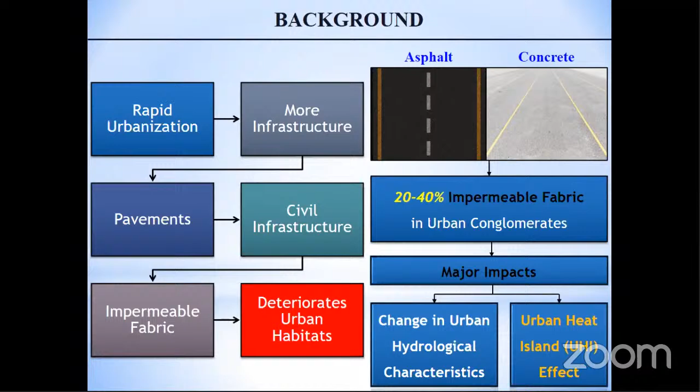We know these pavement systems are an essential part of infrastructure. But looking at these impacts, we need to come up with innovative materials or technologies, or pavement systems that actually improve the quality of life and help create a sustainable urban habitat.

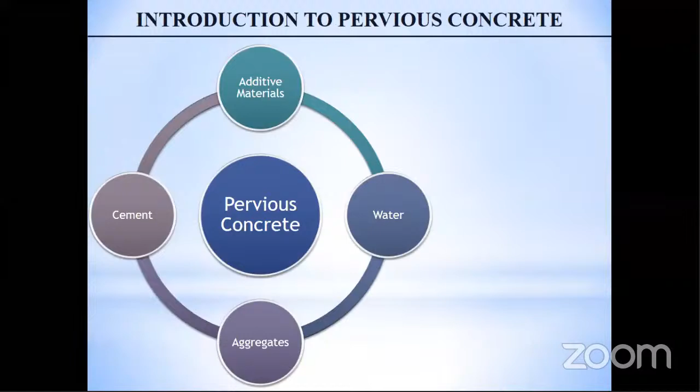The American Concrete Institute recommends that for a concrete material to be designated as pervious concrete, the minimum porosity should be 15%.

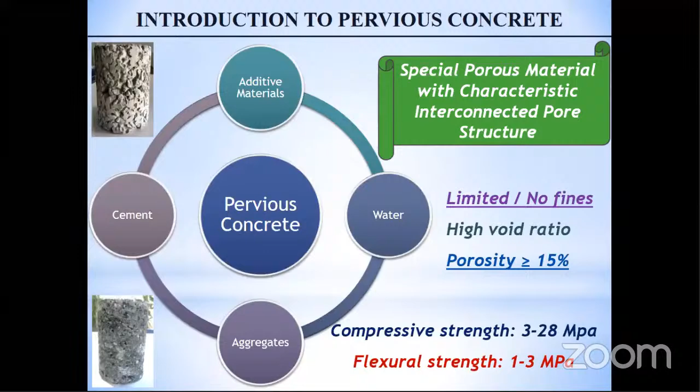The typical compressive strength of pervious concrete varies between 3 and 28 MPa, and flexural strength varies from 1 to 3 MPa. However, much higher values have also been reported in the laboratory.

Now, moving on to the applications. This material is suitable for low to medium volume roads, parking lots, or driveways. This is basically attributed to its low strength, which is due to the absence of fine aggregates from the matrix.

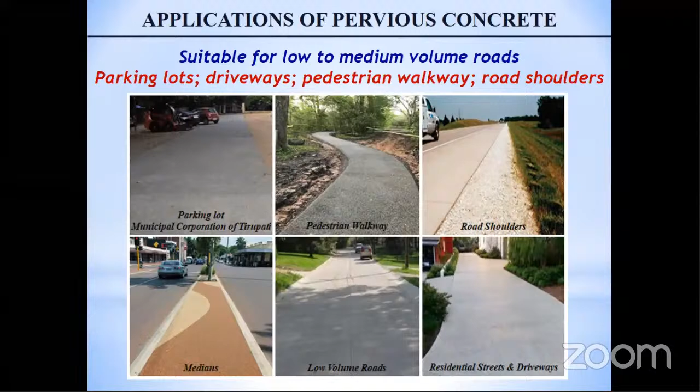Moving on to the materials and mix proportions. Pervious concrete is basically mostly designed with the use of single-sized aggregates. The most common size ranges for pervious concrete vary somewhere between 19 and 4.75 mm. However, recently some researchers are trying to incorporate sand into the mixture, and their new range has been broadened somewhere close to 1.18 mm as well.

Some other studies have further utilized fine sand of true gradation, but the dosages at which it has been added are relatively small, most of them being restricted up to 10% by volume or by weight of coarse aggregates.

The most common binding agent to create this pervious concrete material is ordinary Portland cement. Some other agents such as silica fume, fly ash, GGBFS may also be used. The whole idea of introducing those materials is to create a denser matrix as compared to conventional PC, which would ultimately result in higher strength characteristics.

The typical water cement ratio varies between 0.25 and 0.35 by mass. However, some people report it as high as 0.45. But based on laboratory investigations, we have found out that a water cement ratio somewhere close to 0.3 along with a super plasticizer gives us the best results in terms of strength as well as permeability.

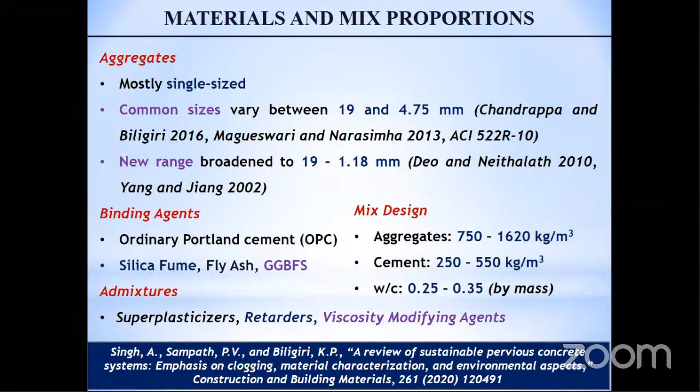In case you want more details regarding the materials and mix proportions, or some future work which could be done in this direction, you can go through one of our recent publications, a review paper published in Construction and Building Materials. It discusses several facets of this material while also highlighting the existing research lacunae.

Moving forward, let's discuss the construction of research test sections. Amongst the two test sections that we have constructed in Tirupati, the first one was constructed in March 2018 in the Municipal Corporation of Tirupati. This was actually a part of smart city work. The test section that was created was about 4 meters wide and 125 meters long. A binary aggregate gradation was used for the preparation of the pervious concrete layer.

By binary aggregate gradation, what I mean is that two aggregate sizes were used: one was 12.5 mm, the lower size, and the other one was 6.3 mm, the finer size. These two aggregates were blended with ordinary Portland cement in equal proportions to create a binary gradation. The cement to aggregate ratio was about 1:3.75, and the water to cement ratio was about 0.32.

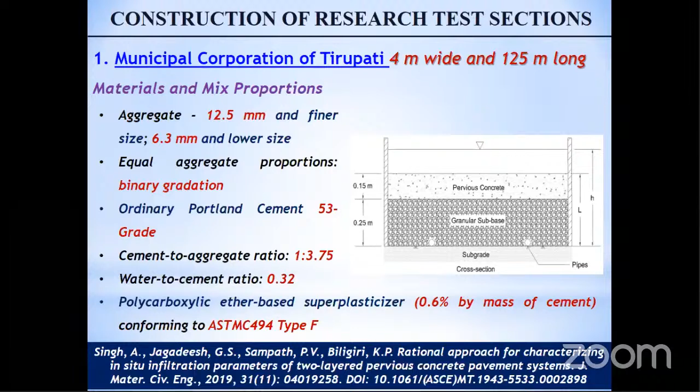Further, a super plasticizer was used in order to enhance the workability of the mixture. The results of the study are also published in one of the international journals, the Journal of Materials in Civil Engineering, which you can refer to for further information.

Now, in order to give you more insights on how this research test section was constructed, I would like to show you a small video.

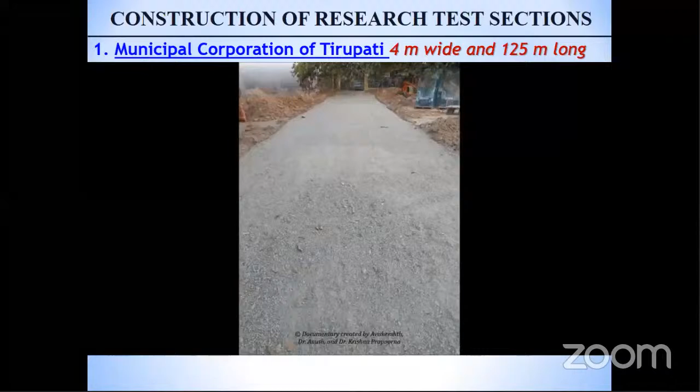As you see, this was basically an initiative for Smart City Tirupati. First, the string lines were drawn and the subgrade was excavated and prepared with the help of about 10 to 12 passes of a static steel wheel roller. Then granular sub-base material was laid and compacted again by about 6 to 8 passes of a static steel wheel roller. A formwork was erected towards one of the sides.

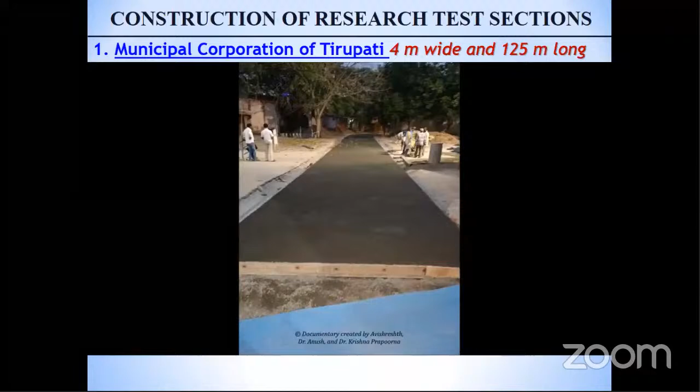This was basically a field laboratory that we constructed for research purposes. Alternate panels were constructed and the pervious concrete was compacted with the help of a vibratory plate compactor. The whole idea of constructing alternate panels was to make sure that the isolation joints were created without any deformations.

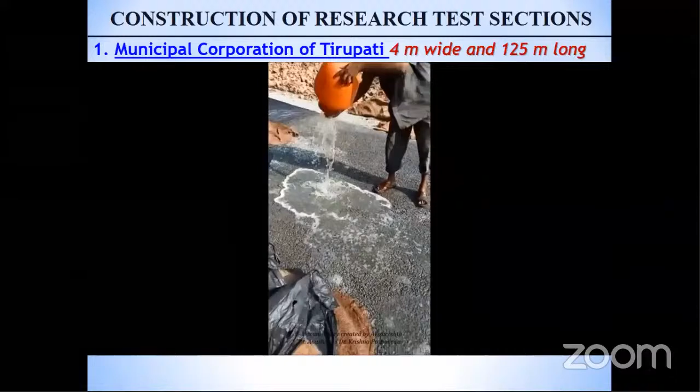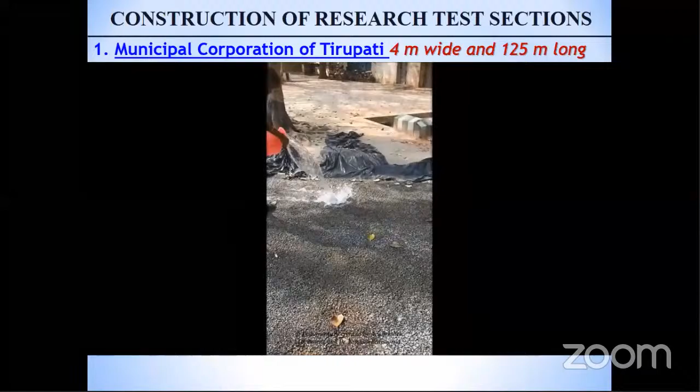Once the stretch was constructed, it was cured for about 7 days, and this was the final view of the test section. In these videos, you can see water being poured onto the freshly constructed pervious concrete pavement, and you can see the rate at which it is percolating into the ground.

Then again, as I discussed, a small formwork was erected towards one of the sides of the pavement. The whole intention of doing this was actually to compute the infiltration rate of pervious concrete pavements in the field.

A lot of literature is available which discusses the permeability rate of pervious concrete material in the laboratory. However, very limited literature exists which talks about the field infiltration rate of the pavement system, which includes both the surface as well as the sub-base layer.

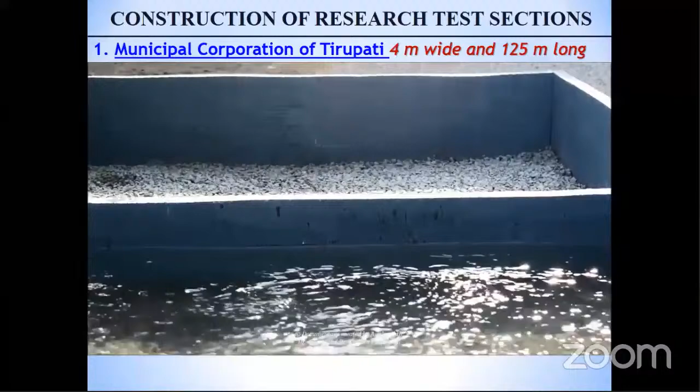Now, this water that you see percolating through the member is actually a real-time simulation. You can see the rate at which it is percolating. So in order to measure the infiltration rate, graduations were marked onto the formwork, and the time taken by the water to fall from initial to final head was noted. Later, Darcy's law was applied to investigate the infiltration rate.

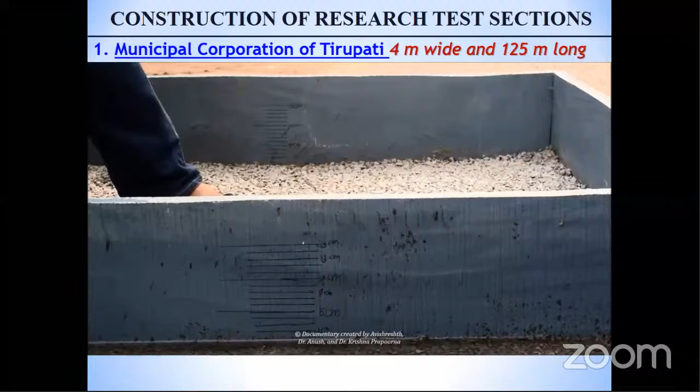Now moving forward, the first objective of the study was to construct the test sections, which was accomplished with huge success. Then the second aspect was to investigate the field infiltration of the pervious concrete pavement system, which included both the surface as well as the sub-base layer.

So the Green-Ampt equation as well as Darcy's equations were combined together, and it was found out that the infiltration rate of the entire system varied somewhere between 0.11 and 0.32 centimeters per second.

Later, we did a surface infiltration rate test as per ASTM C1701, where about 40 locations on the entire stretch were selected and investigated. It was observed that the surface infiltration rate varied somewhere from 0.02 to 1.28 centimeters per second.

At the bottom of the screen, you can see there is an infiltration ring being sealed with glass putty over the surface of the pervious concrete pavement, and graduations were marked onto this ring. The whole intention was to maintain the head of water between 10 and 15 mm.

The idea is to note down the amount of water and the time it takes to pass through the surface of the pervious concrete layer.

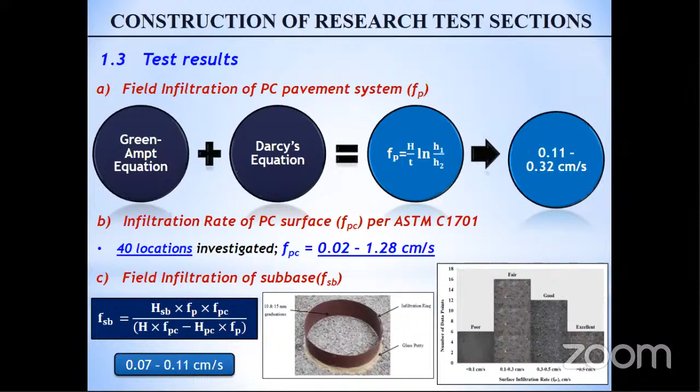The aggregate size varied between 12.5 and 4.75 mm, and the water cement ratio here was slightly lower as compared to the previous work, where it was reported as 0.32. In this case, it was about 0.3.

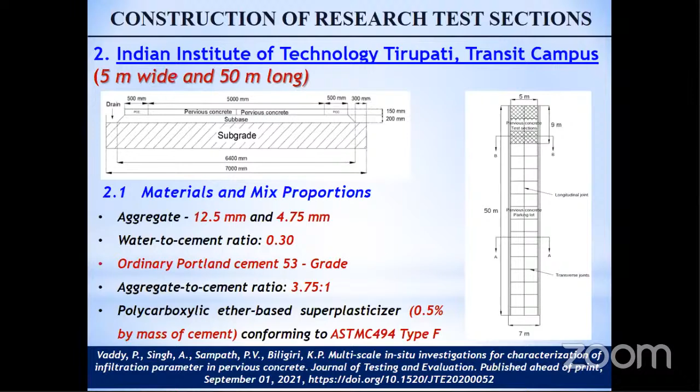Again, OPC cement was used, and the aggregate to cement ratio was 3.75:1. The results of the study have already been published in one of the international journals with ASTM, as the Journal of Testing and Evaluation, which can be referred to for further information.

So let's first talk about the construction chronology. We again excavated the existing subgrade. A large amount of boulders, termed as excavated granulates, were removed from the site, because the presence of such large boulders will lead to the development of a poor subgrade. So the first objective was to remove these granulates.

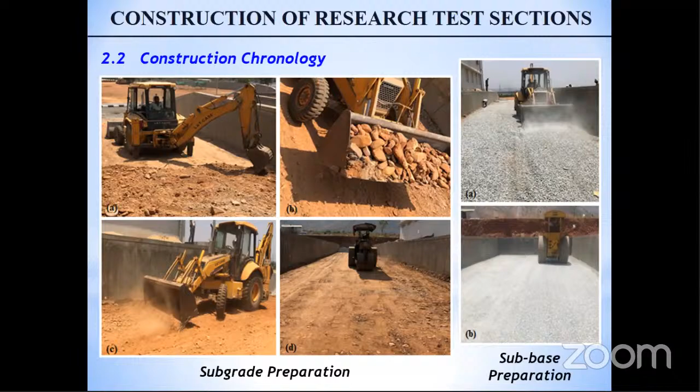Once that was done, good earth was laid, well compacted, which was followed by the laying of granular aggregates in order to prepare the subbase. Further, the subbase layer was compacted with the help of a static steel wheel roller.

Then again, as you see, panels and formwork were erected, and pervious concrete surface was laid. The basic difference between this study and the previous one was that in the previous study, in-situ preparation method was used. But in this case, ready mixed concrete trucks were used, where the concrete was first prepared at a batching plant, then came to the site and was poured through RMC trucks. This increased the rate at which the pervious concrete was constructed.

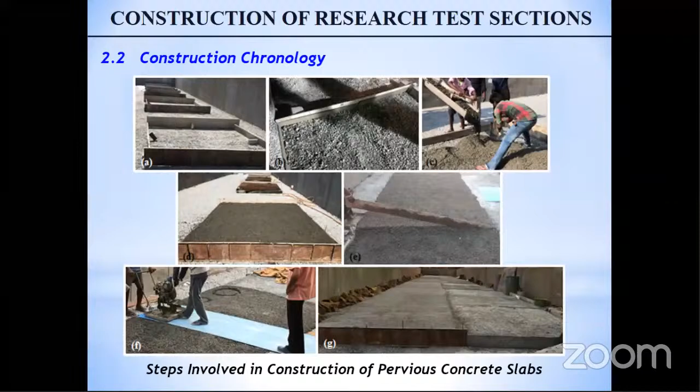As you can see, the surface of the pervious concrete layer was compacted with the help of a vibratory roller. On the bottom left side of the screen, you might see a small blue colored sheet over which the vibrator rolls. This was done to prevent the sticking of aggregates to the bottom of the vibratory compactor, as such a phenomenon might lead to stripping or raveling situations in future.

One of the objectives of the study was to investigate the infiltration rate through the surface layer of pervious concrete, while recommending the optimum size of specimen that could be prepared in the laboratory to replicate the field infiltration rate. For this, we had CPVC and PVC slotted pipes of diameters and dimensions as shown. These pipes were embedded within infiltration rings made of high density polyethylene material. As shown in the schematic, about 3 slabs were chosen where infiltration rings of varying diameters were placed, starting from 110 mm up to 630 mm.

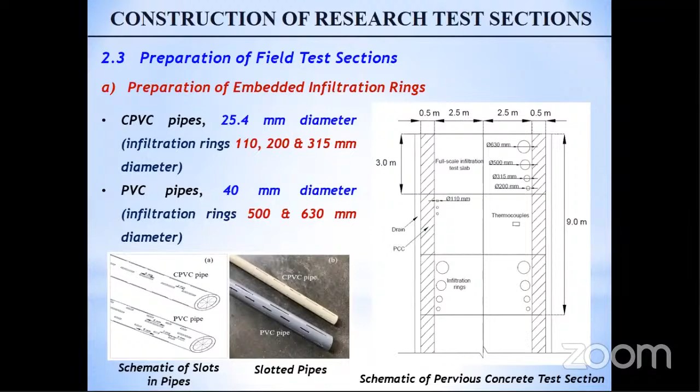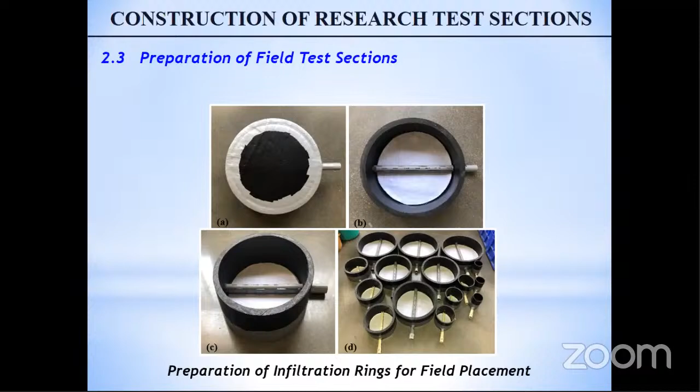You can see this is how the infiltration rings were placed. They were sealed at the bottom with geotextile materials. The objective was to seal the bottom so that water doesn't intrude into the lower layers, and also to ensure that aggregates from the lower layer as well as the top surface do not puncture the geotextile. Once all infiltration rings were prepared, they were laid onto the test section.

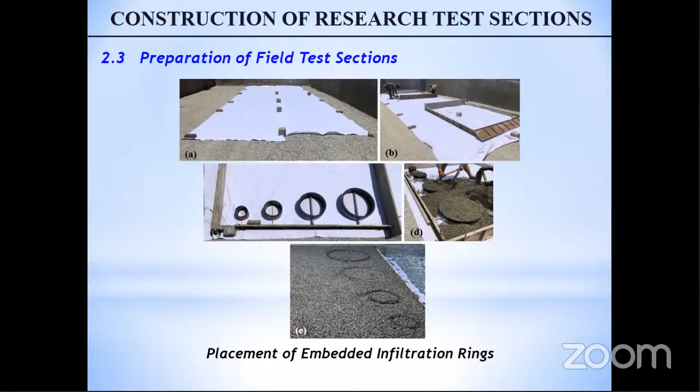As you can see, the pipes were placed adjacent to the formwork, and fresh material was poured into it and compacted in a similar fashion as we do for the construction of the pervious concrete layer. This is basically an infiltration ring which was placed over an embedded ring in order to investigate the infiltration rate of the system.

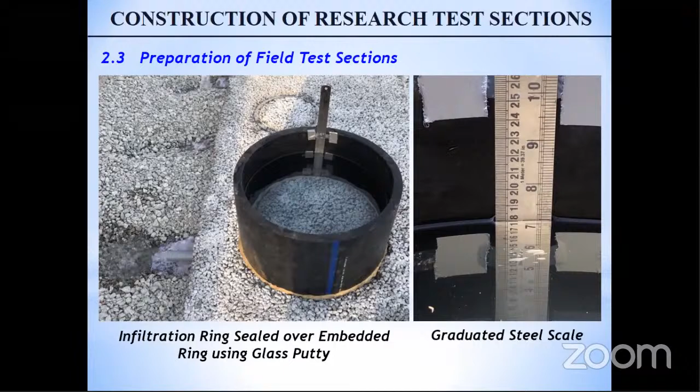On the right side, there is a small pipe projecting outwards from the pervious concrete layer. What we did here was fill up this ring with a designated amount of water. In the meantime, we kept the pipe outlet closed, and once the initial head was noted, the outlet was opened and the water was allowed to pass through the system. The time taken by the water to fall from initial to final head was noted, and Darcy's principle was used to investigate the infiltration rate.

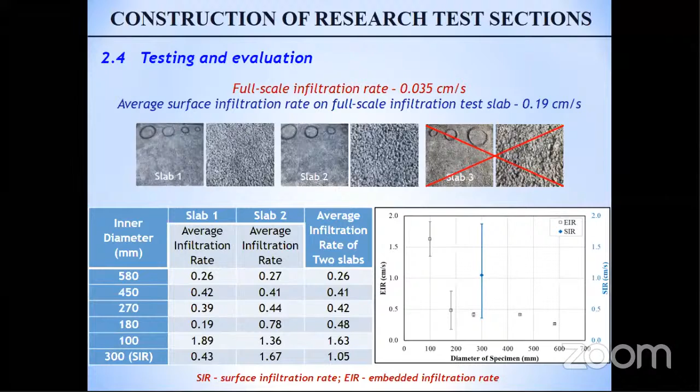Now, amongst 3 test slabs, it was found that one was clogged. So for final results, readings of only 2 slabs were presented, and it was observed that the infiltration rate tended to decrease with increasing size of the specimen, with a ring diameter of about 300 mm giving the true infiltration behavior of a full scale pervious concrete slab. This 300 mm diameter is actually close to the ASTM infiltration ring diameter, which is also close to 300 mm.

As I told you, in the previous study we used a binary aggregate gradation, where 2 different aggregate sizes were used in equal proportion. Based on laboratory tests as well as field investigations, we were able to corroborate that this binary gradation gives us higher strength characteristics while maintaining adequate porosity. The porosity for the Municipal Corporation test section was about 25%, which is much higher than 15%. For the IITT section, the porosity was really high, about 32%, but the strength was very low.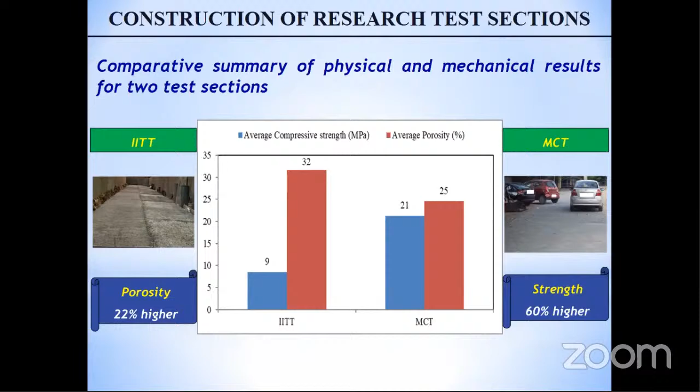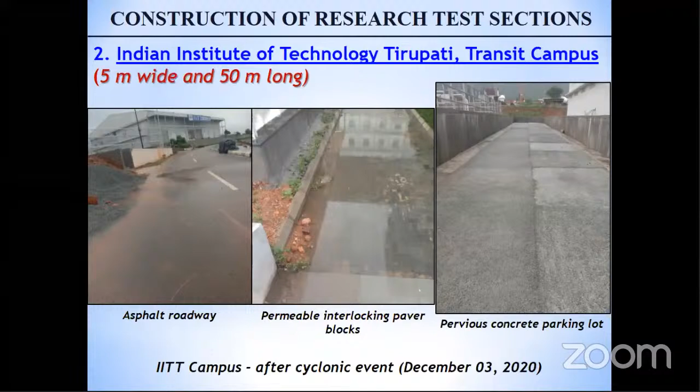But on the right side, you see there is a pervious concrete parking lot. The entire campus was filled with water all across, but this was the only stretch where not a single drop of water actually accumulated over the surface. The entire water was drained into the underlying layers.

Now, moving on to the environmental and cost benefits of pervious concrete. In order to investigate the environmental benefits of this material, a small life cycle assessment was done. The whole idea was to develop a user-friendly toolkit which can be used for the computation of life cycle assessments by common engineers and practitioners with ease.

An Excel program was created, and the environmental impacts of the pervious concrete pavement were computed. This toolkit can also be used to compute the impacts of building materials as well as other types of pavement systems.

This was basically a comparative study where pervious concrete pavement was compared with Portland cement concrete pavements. The different study parameters were embodied energy, carbon dioxide (kg CO2 equivalent), and capital cost. A cradle to gate LCA approach was adopted, meaning starting from the raw material production to the placement at the site.

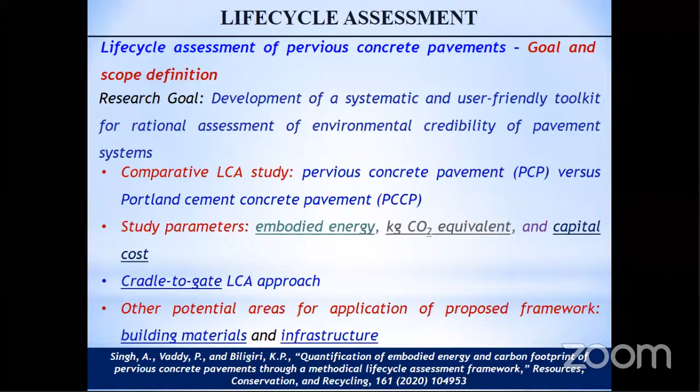The results of the study are published in one of the journals whose details are shared below. First, the data was gathered - primary data which was directly collected from the construction agency, and secondary data which was collected from the existing literature.

This comparative study was based upon the test sections which were constructed in Municipal Corporation of Tirupati as well as Indian Institute of Technology, Tirupati.

You can see 4 different scenarios were compared: pervious concrete with a granular layer, where the mixing method was RMC, versus Portland cement concrete with a granular layer, where the mixing method was RMC. For scenarios C and D, the comparative assessment was the same, with only the difference being in the mixing method, that is in-situ.

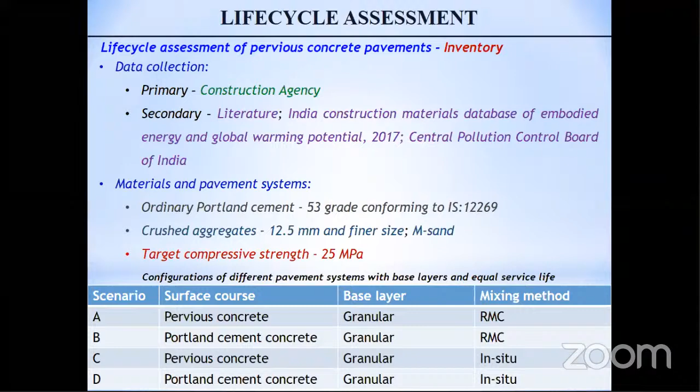Then the functional unit was defined. The functional unit considered for the study was a 1 kilometer long road, 3.5 meters wide and 0.35 meters thick. By functional unit, I mean the aspect which was considered for the study to perform the analysis.

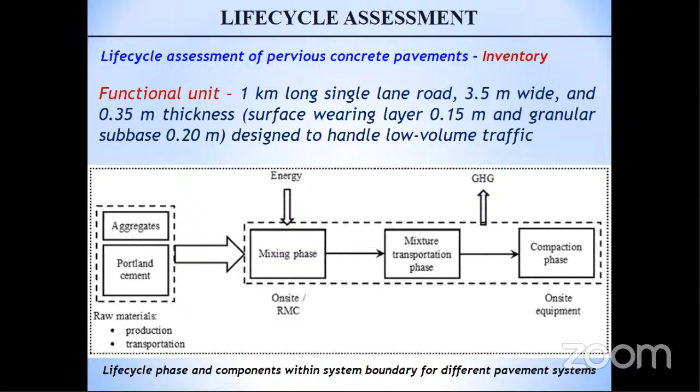There were different phases, starting from material extraction to mixing, transportation, as well as compaction phases. The energy that was consumed and the emissions that were released during the entire process were quantified. This is the model that was developed to compute these environmental impacts.

These are some of the equations which were used to define the input parameters within the proposed model. I wouldn't go into much detail of these models, as this can easily be looked at through the published version of the study.

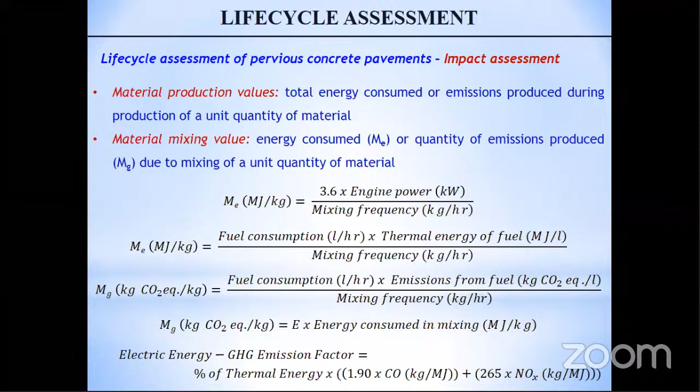Now, this is where the comparative assessment comes into picture. As you can see, for RMC mixing, the embodied energy and carbon dioxide equivalents of pervious concrete pavement were lower than that of Portland cement concrete pavements by about 3%.

Similarly, for in-situ mixing as well, the embodied energy and carbon dioxide emissions for pervious concrete were lower than Portland cement concrete by 3%.

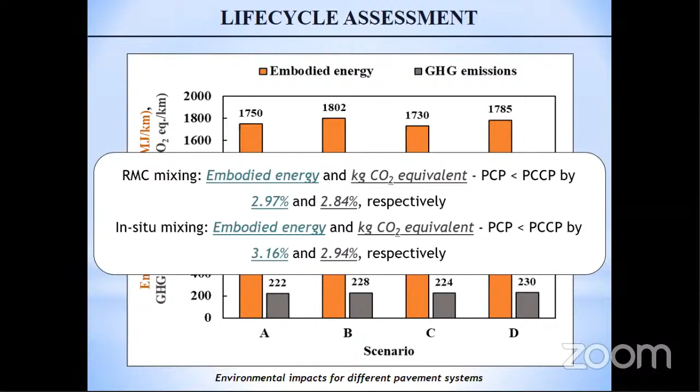This reduction may be attributed to the lower amount of cement required for the development of the pervious concrete layer. Then a small sensitivity analysis was done to find the parameter responsible for the most amount of emissions as well as energy consumption. It was found that the material production phase results in the highest emissions as well as energy consumption.

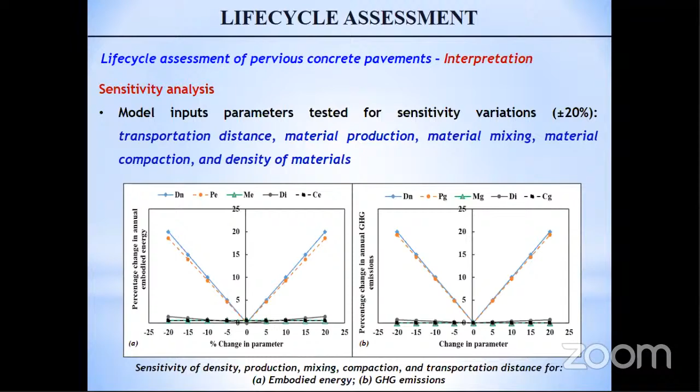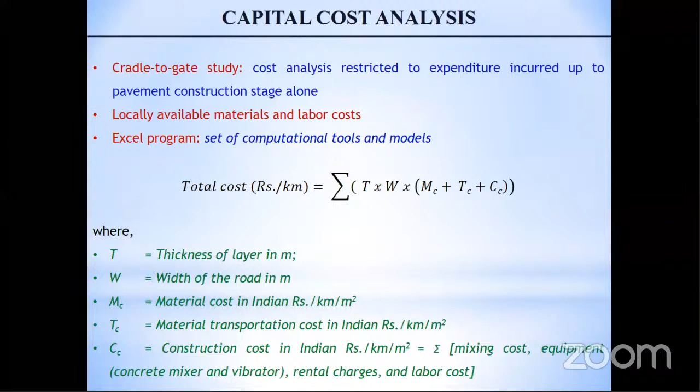Now, once the environmental benefits were quantified, the cost analysis was performed using the model which is shown on the screen right now.

Again, it was observed that for RMC mixing, the cost of pervious concrete construction was higher than that of Portland cement concrete by about 1.2%. Whereas for in-situ mixing, the capital cost was lower by about 4%.

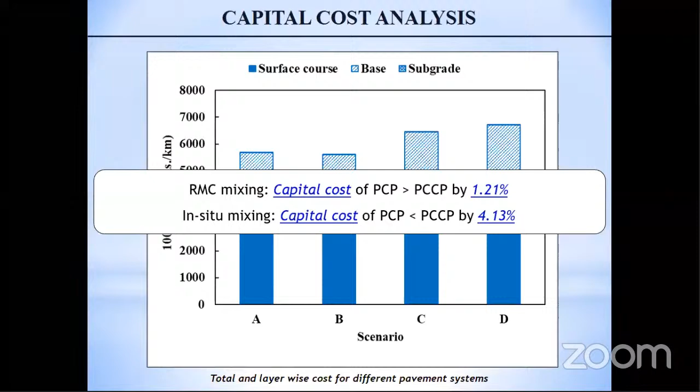Now, moving on to the conclusions and recommendations, the first thing that we need to do is establish laboratory as well as field correlations. A lot of lab research has been done in the past, but there exists limited field studies which actually corroborate the laboratory as well as field studies.

Then we need to identify systems which have higher strength, but at the same time serve the purpose of water permeability. Then we need to construct pervious concrete pavements for all traffic as well as all weather roads.

Then clogging is one of the serious concerns associated with pervious concrete. Pervious concrete has an open graded structure, so as a result, it often results in the accumulation of silt and dust within its matrix, which ultimately leads to the deterioration of the infiltration rate. Therefore, we need to come up with maintenance and repair strategies to enhance the life of this material.

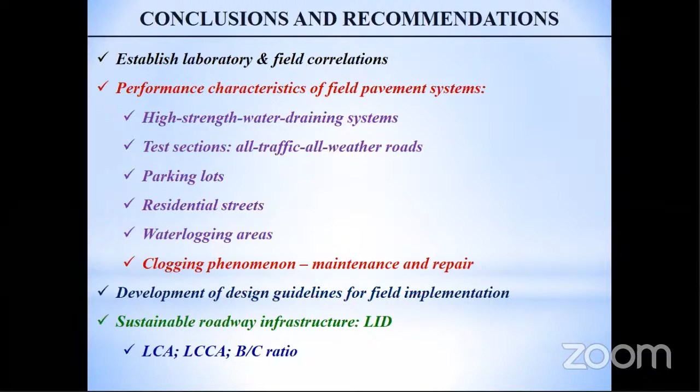Then there is a need to develop a specified set of field implementation guidelines. Last but not the least, we need to further develop frameworks to quantify the benefit cost ratios and the environmental impacts associated with this special pavement material and the associated pavement systems. Thank you.

Yes, for sure. Somebody is asking about clay soils, especially black cotton soils and lithomarge soils, which have very less permeability values. In case if we find such type of soils, how well will this pervious concrete work?

Actually, there are some limitations associated with the construction of this material. In case we have a subgrade layer which consists of fine sand, silts, or clays, then we have two options. The first option is we may not construct this material there, because there are certain limitations associated with the subgrade, which might ultimately lead to settlement of the pavement system once open to traffic, as well as other environmental conditions. But ideally, such studies are still on the laboratory scale, we have tried to do some work in this direction. What we have come across is in such subgrade conditions, we first need to remove about 500 to 600 mm of the native soil, and then that has to be filled with good gravel and good earth, and then we can go ahead with the upper layers of the pavement system. I hope that answers the question that was asked.

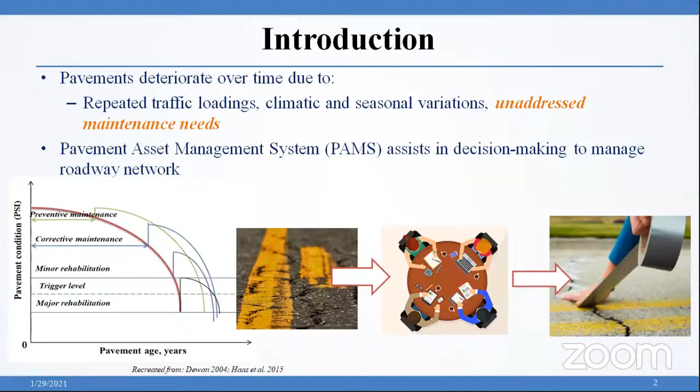For the development of any pavement asset management system for any agency, it should abide by these objectives. The first objective is to collect the performance condition of all road sections under their jurisdiction. Then, from the performance data, assess the condition of the pavement. After assessing the condition, identify the homogeneous sections pertinent to each road. Then predict the pavement performance in the future. Identify alternate maintenance strategies for each group of homogeneous sections. Then prioritize the road sections based on need and budget. After that, implement the maintenance on those road sections.

As I said, the first objective of PAMS is to collect the performance data of all road sections. The performance data includes structural performance and functional performance. Structural performance data is usually collected by performing a structural condition survey. For collecting structural condition data, agencies usually go for non-destructive testing where falling weight deflectometer, Benkelman beam deflectometer, or rolling weight deflectograph are employed to collect surface deflection when a peak load of 40 kilonewtons is applied.

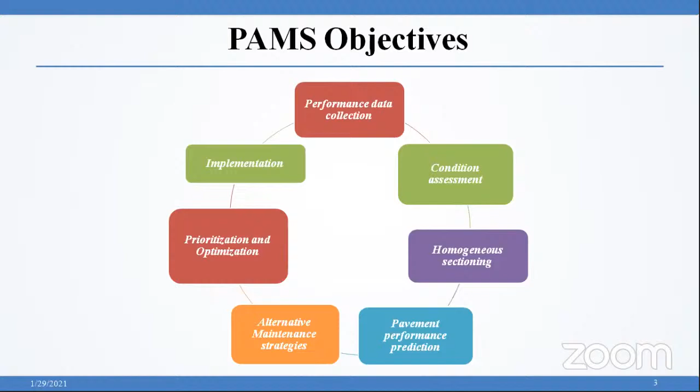The next thing is functional data collection. In functional data collection, one has to identify the roughness and ride comfort that the road provides to road users, and what distresses are present on the road section. The overall functional condition survey methods can be divided into automated and manual.

In manual condition survey methods, an expert rater will walk along the road section and observe what distresses are present on the road section, note down all the identified distresses into a rating sheet, and assess the pavement condition by assigning deduct values for each distress.

In automated methods, since the manual data collection method is quite cumbersome, tedious and laborious, and data collection for a stretch of 50 kilometers itself will take more than a week, this ultimately delays the data analysis as well, and timely maintenance may not be applied for pavements which are in dire need of it.

Therefore, automated condition survey methods have been developed, in which a vehicle will be equipped with a series of data collection modules. These include cameras, laser sensors, GPS systems, 3D ground penetrating radars, and 3D data collection systems embedded into a vehicle. This vehicle traverses the road, and while it does, it collects geometrics and distress data.

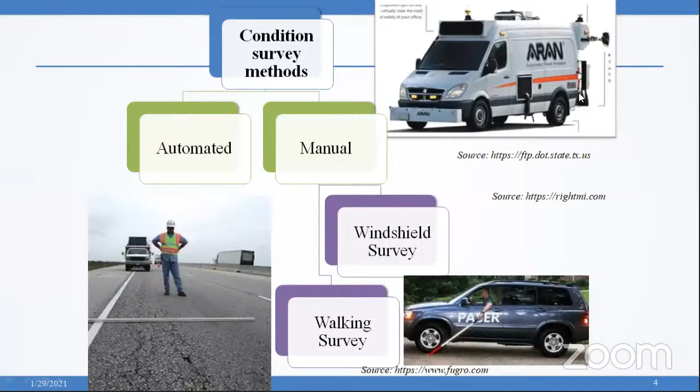This data will then be analyzed to assess the condition and suggest maintenance strategy for the pavement. Here is an automated road analyzer developed by Fugro Private Limited, USA. These are photographs of various automated data collection vehicles that have been used across the world.

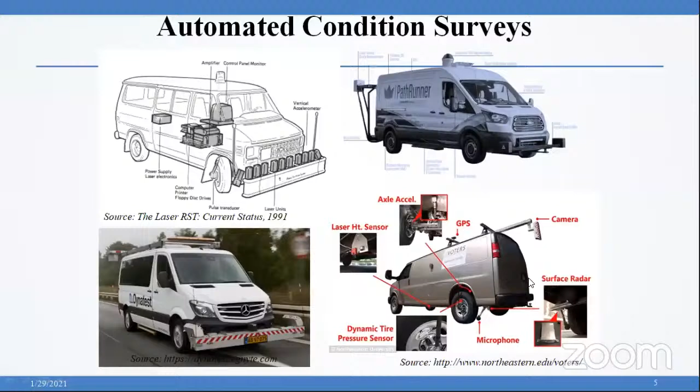This is a schematic of a first generation automated condition data collection vehicle called Laser Road Surface Tester, developed by the Swedish National Road and Transport Research Institute. This is Pathrunner, and this is Dynatest, mostly used in the USA. And this is Voters, developed by researchers at Northeastern University, USA.

The Andhra Pradesh Road Development Corporation initiated the road management system in 2016. As part of that, they started collecting functional condition data using a network survey vehicle manufactured by the Australian Road Research Board Limited, which has several modules.

This vehicle has 3 cameras fixed to the front side and one camera fixed at the back. The 3 front cameras capture the right of way, driver side, and passenger side assets of the road, while the rear camera records the pavement. The rate of collection is such that each frame can capture a 10-meter long stretch and 3.5 meters wide, covering one lane width of the road section.

This vehicle was brought to the IIT Tirupati campus at our request to APRDC, and we explored it and were given training on collecting data using the NSV. This vehicle is capable of collecting the geometrics of the road section.

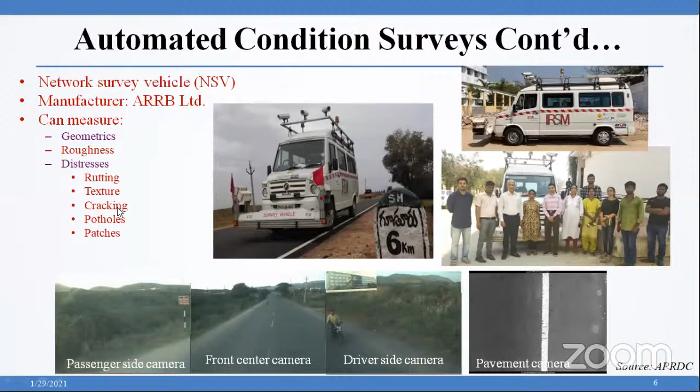Roughness is measured by a series of laser sensors fixed to the front bumper of the vehicle, along with accelerometers. The readings of the laser sensors and accelerometers are used to measure rutting, roughness, and texture. The videos recorded by the cameras are analyzed to measure the extent of cracking, potholes, and patching.

The videos recorded by these vehicles are analyzed frame by frame, with a person employed to go through each frame and quantify the extent of each distress based on its severity condition. This is then noted into a pavement condition assessment sheet, and a pavement rating is assigned. This is a very tedious process that can take days to analyze the data.

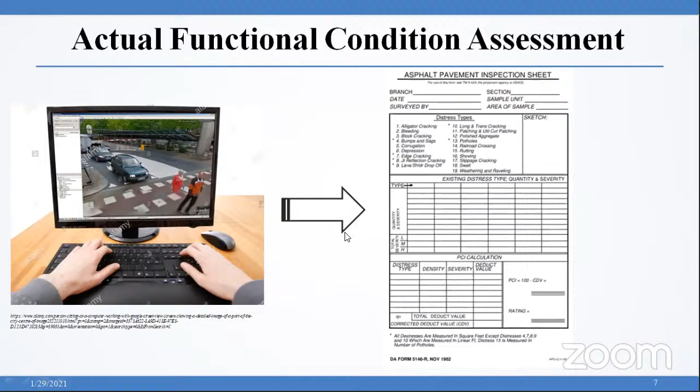Therefore, automated data analysis techniques have been used, incorporating image processing and machine learning techniques for detecting various superficial distresses from pavement images. This led to recent developments making use of computer vision.

Most of the studies had detected only one variety of distress from pavement images. So we thought, why not detect more classes of distresses such as cracking and potholes. Within cracking, there are also several classes like longitudinal cracking, transverse cracking, edge cracking, and alligator cracking. So we developed a multi-object, multi-distress detection system for detecting multiple distresses present in a pavement image using artificial neural networks and artificial intelligence techniques.

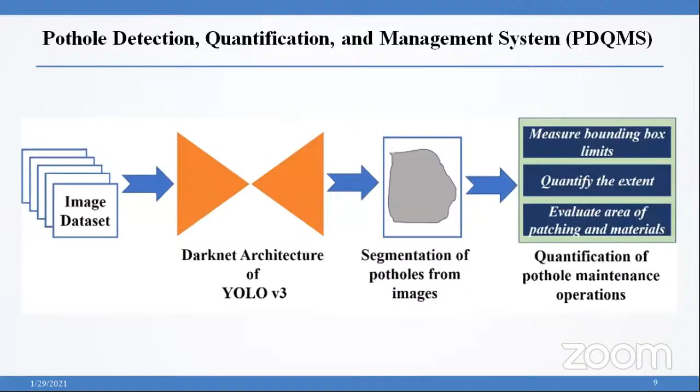After detection, the area in which the pothole was present was segmented from the pavement image, and from that, the amount of patching material required for filling the pothole or doing the patching work was quantified.

So the dataset had 41 images of road sections in the Andhra Pradesh state, and the image resolution of each image is 1280 pixels by 960 pixels. As you can see, this is the snippet of an original pavement image.

Since the quality of data usually plays a vital role in the efficiency of the detection rate of the algorithms, images were pre-processed using image processing techniques like histogram equalization, Gaussian filtering, and Gaussian noise removal techniques.

After that, a LabelImg tool was used to mark and label the distress types present in the pavement section. We considered 3 classes for potholes: low severity, medium severity, and high severity pothole. We used the ASTM demarcation, which classifies the severity of potholes based on depth.

Since the images are two-dimensional, we cannot measure the depth directly. So by visual observation, we assigned the severity by comparing the texture of the pothole with the background. The depth was assumed, and an appropriate class label was assigned during the labeling process.

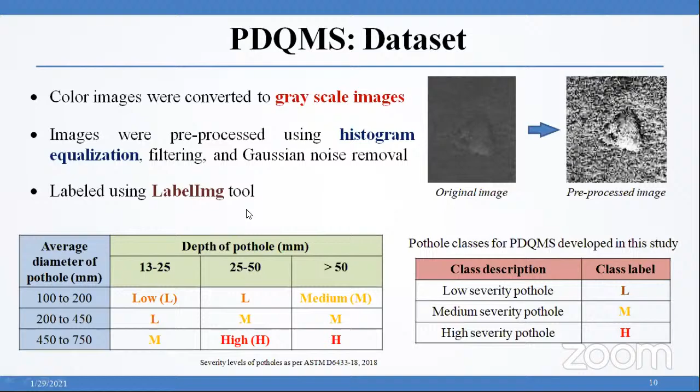After labeling, these images were fed to the YOLO v3 architecture, and about 3000 iterations were performed. At the end of the 3000 iterations, we achieved a precision of 89.23%, and the network had identified the pothole regions, with a bounding box marked on it along with the class label.

After that, a set of code was written in Python where the marked region will be segmented from the entire pavement image.

As I said earlier, the camera facing the pavement is capable of collecting one width of the roadway section, which is about 3.5 meters, meaning one lane width of the road section, about 3.5 meters.

So this pavement image, the image resolution, was correlated with the pavement width, and the length was also identified. From these dimensions, the segmented portion and the pixels of the segmented region, the patching area was approximated.

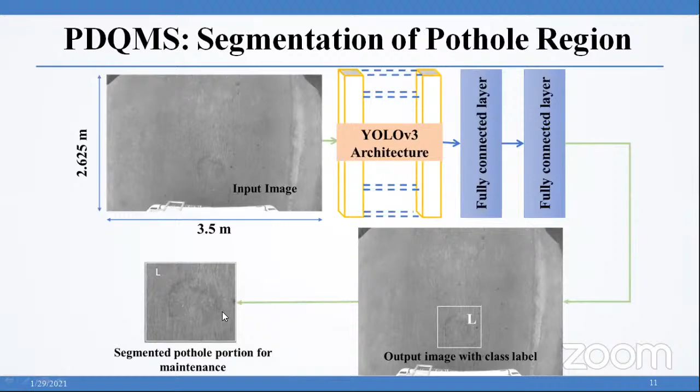The quantity of patching material was found to be a factor, including the dry volume of the materials before compaction, the patch depth, and the patching area multiplied by the severity of the pothole - which is nothing but the class label. Based on the class label, we would be able to identify the depth of the pothole. By multiplying these three, we achieve the amount of patching material required to do the maintenance of the pothole.

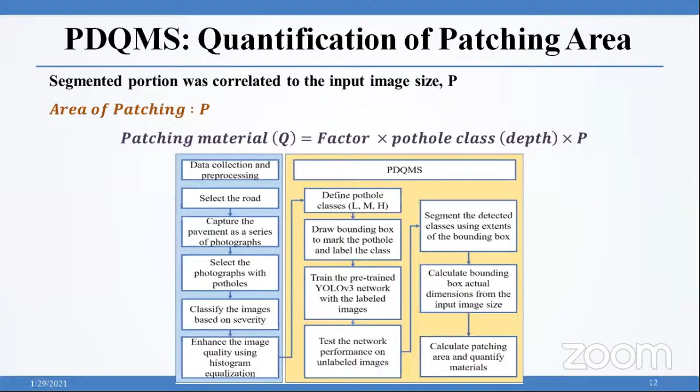So these are the results, and this work has been published in the MAIREPAV9 International Conference in 2020.

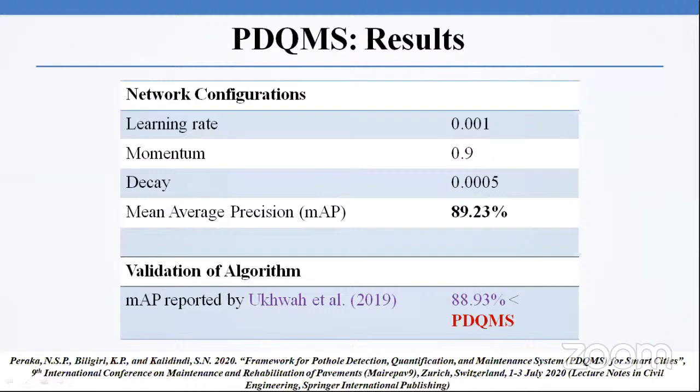With the experience gained from the pothole detection system, we used YOLO version 4, an upgraded version of YOLO version 3, for detecting multiple distresses in the pavements. We identified six distresses the system should detect in pavement images and videographs: alligator cracking, longitudinal cracking, transverse cracking, edge cracking, potholes, and patch deterioration.

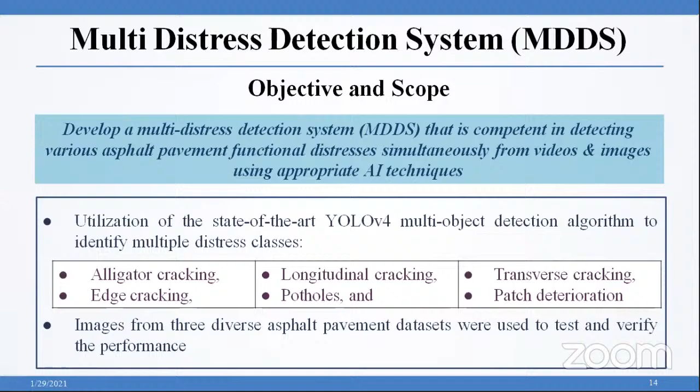For the development of the system, we first needed to prepare the dataset. For training, we collected some open source data available online, and also images collected by the Andhra Pradesh Road Development Corporation as part of its annual maintenance program.

In this slide, I'll be talking about the datasets we collected and considered for developing the multi-distress detection system. The first is dataset A, collected from Andhra Pradesh Road Development Corporation. We collected 1,308 videos of 541 road sections in Andhra Pradesh state, and all these videos were segmented, with each video having about 500 video frames.

After segmenting these videos, we wrote a MATLAB code for segmentation, and obtained 670,328 images. Since the dataset is huge, we considered only 15% of the total images, which is 100,550, for this study. After analyzing each and every image, we found 800 images which had visible distresses.

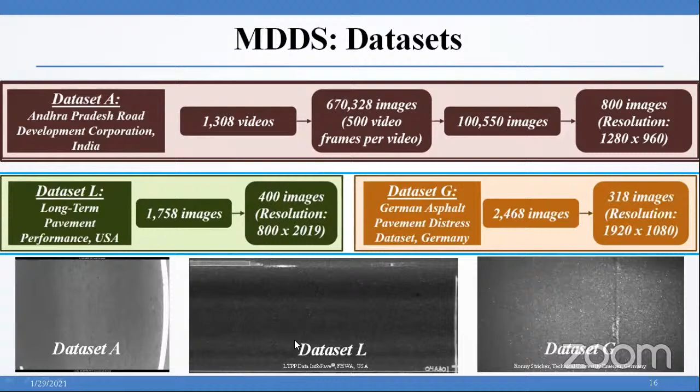For dataset L, the images were taken 90 degrees exactly perpendicular to the direction of travel. Therefore, the images were first rotated 90 degrees in the anti-clockwise direction, and then these color images were converted to grayscale images. Dataset G already has grayscale images, so we did not perform any dataset-specific preprocessing on it. After converting the images in each dataset to grayscale, a set of operations were performed to enhance the image quality, including histogram equalization and various filtering methods.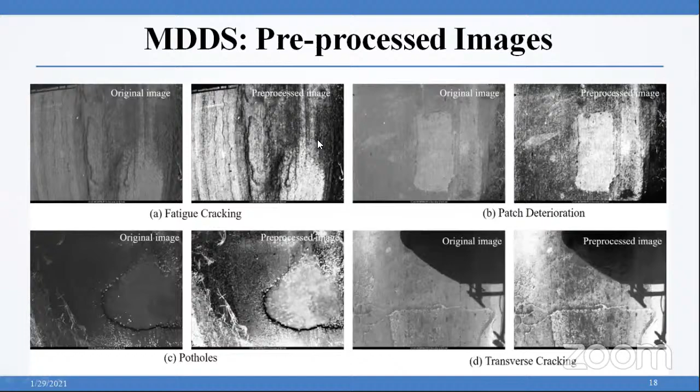After preprocessing, class labels were created, since we have to first teach the network where the distress is present and what type of distress it is. For this, the three severity levels of each distress were considered, since we have six distresses with three severity levels, so a particular labeling was given. For example, if the distress present is fatigue cracking of medium severity, a class label of FCM will be assigned to it.

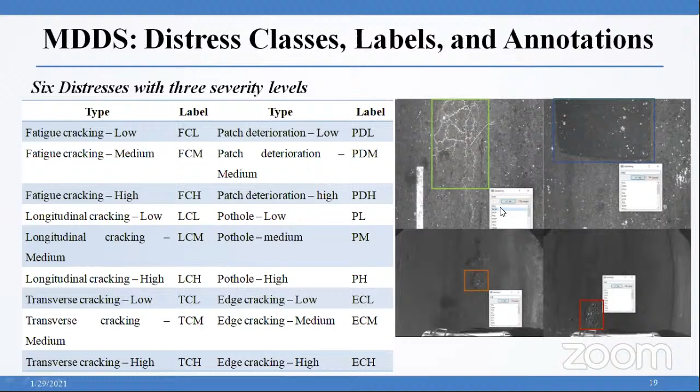For the creation of annotations, we used the LabelImg tool. In LabelImg, each image was read, a bounding box around the distress was marked, and then the particular class label was assigned to it.

For the development of the MDDS, we used the YOLOv4 architecture. YOLOv4 is an upgraded version of YOLOv3, where several data augmentation techniques were introduced in the backbone and head detection, creating various transformations of the input images to build a larger dataset so the network performs better in detection.

The YOLOv4 architecture was trained on the MS COCO dataset, which has 80 classes, and about 60,000 images. This learned network was then transferred, and several configuration files related to YOLOv4 were modified to suit the multi-distress detection system, to perform multi-distress detection for this study.

The number of classes in this study was 18. The classes mentioned in the YOLOv4 architecture and the weights file were modified to suit the 18-class detection problem, and the distress classes data was also updated into the system. Then the preprocessed images as well as the annotation files were stored into the system.

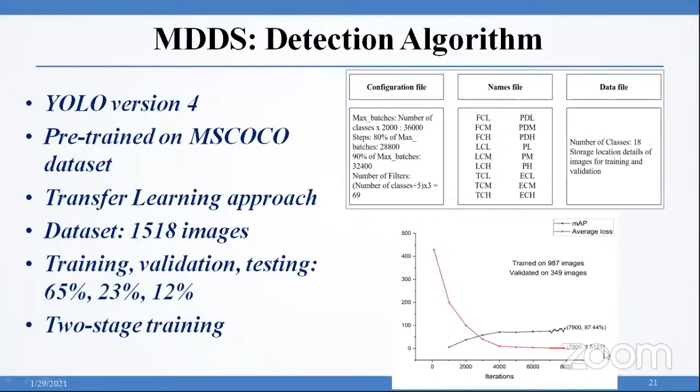At the end of 7900 iterations, the MDDS achieved a precision of 87.44% and an average loss of 1.5123, which was quite promising compared to the results reported in the literature. Various images were then tested on the MDDS, and the performance was recorded.

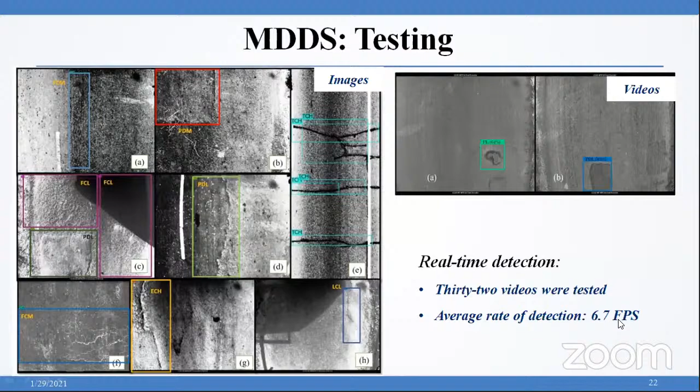After analyzing 32 videos, we achieved an average detection rate of 6.7 frames per second, which is quite good. In addition to the datasets, we tested the MDDS performance using various images downloaded from Google.

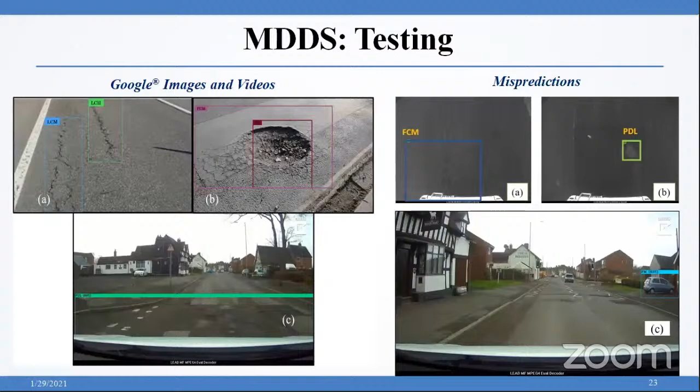These are the major mispredictions that we found, and these mispredictions could be reduced by training the system further on a larger number of images.

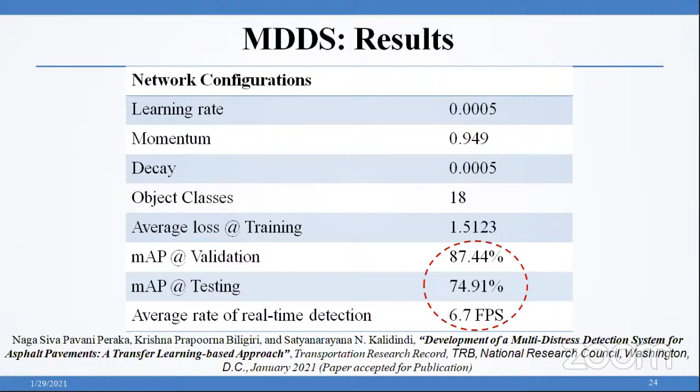These are the results, and this work has been accepted for publication in TRR, the Transportation Research Record.

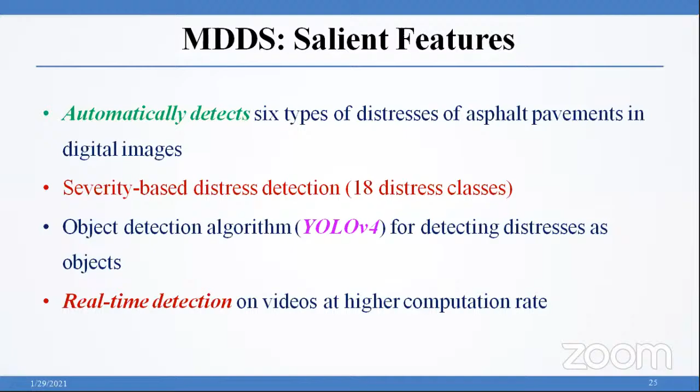As you can see, the developed system is the first study where multiple distresses — 6 types of distresses with 3 severity levels — were studied and detected using the system. Real-time detection is possible, and mispredictions could be reduced by training the system on more images.

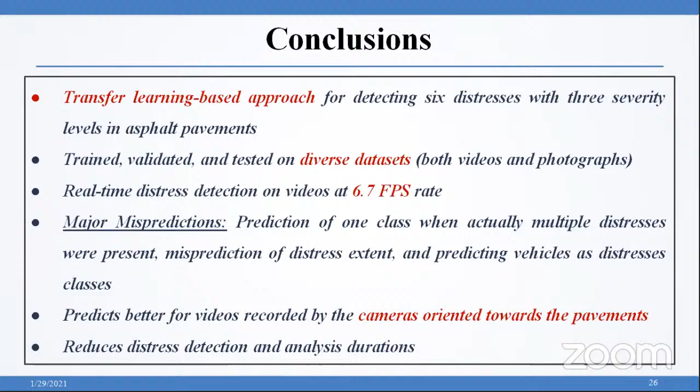The detection rate and the prediction probability will be high for videos or images taken by a camera facing the pavement. Thank you. If you have any questions, please ask.

Well madam, thank you very much. I would like to extend thanks to both of you. Avashish Singh and Pavani have done an excellent job, excellent work in your research. Maybe this asset management is a new insight to us. So we request the participants to post your queries, or you can unmute and talk to these two people so that your queries will be clarified.

Avashish and Pavani, let's wait for a while. Once we address the comments, then we can leave this. My voice is audible? Yes sir. Yes sir, yes.

So meanwhile, I'll ask Avashish, are you there? Yes, I'm here. Yeah, I have a small query.

You have done pretty good work in Pervious Concrete, a very good number of journals that you have published. A small query regarding concrete clog - do you have any perceptions towards this, and how do you address it? Suppose Pervious Concrete is giving a sustainable life of 20 to 30 years, but because of the concrete clog, there might be a chance of a limitation towards service life. How do you address this problem?